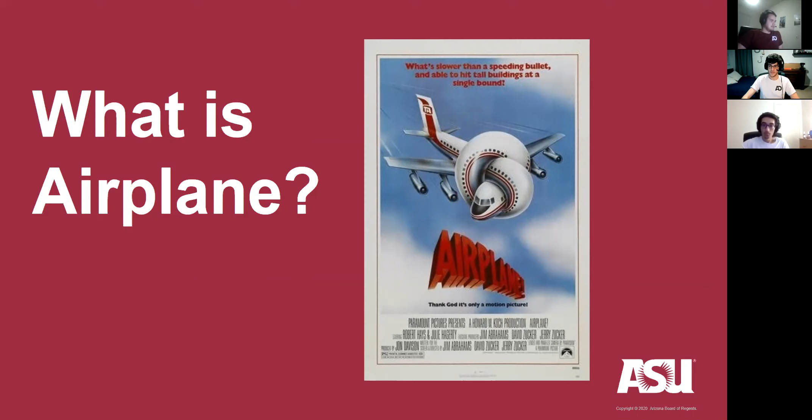Very essential, very prime. Next slide. So, as we all know, Airplane is a movie released in the 1980s involving the wacky antics of a former pilot trying to win back his girl. Great movie, by the way, recommend you all see it. Fantastic, a joke every 5 seconds. Good jokes too. Next slide.

So, the legal definition of an airplane, according to the FAA, the regulatory body that regulates aviation in the United States, at least. Sorry, I just had a message pop up. So, an airplane is an engine-driven, fixed-wing aircraft heavier than air that is supported in flight by the dynamic reaction of the air against its wings. Fairly simple definition. But if we go to the next slide,

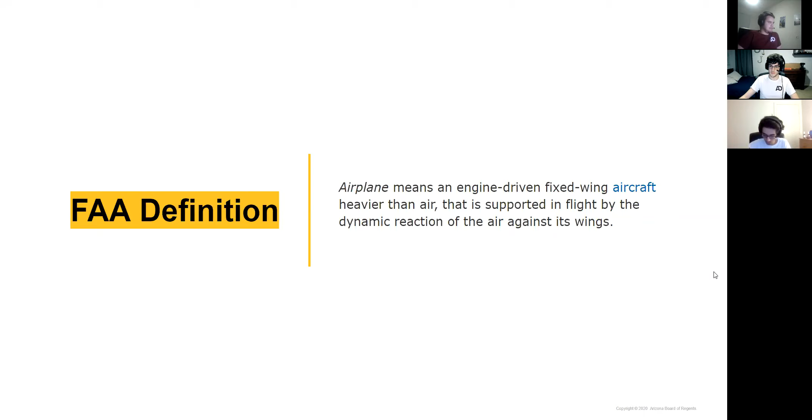I want you all to let me know which of these is in fact an airplane. We will not be advancing until I get some answers.

I really like the leftmost one. Yeah, the top left or the bottom left? The top left, but I don't know if that counts. Oh, it doesn't have wings. Does it have wings? It has short, stubby wings, but sadly I think it's more helicopter than airplane. I wish. Still badass, I wish though. Very badass. Any other guesses?

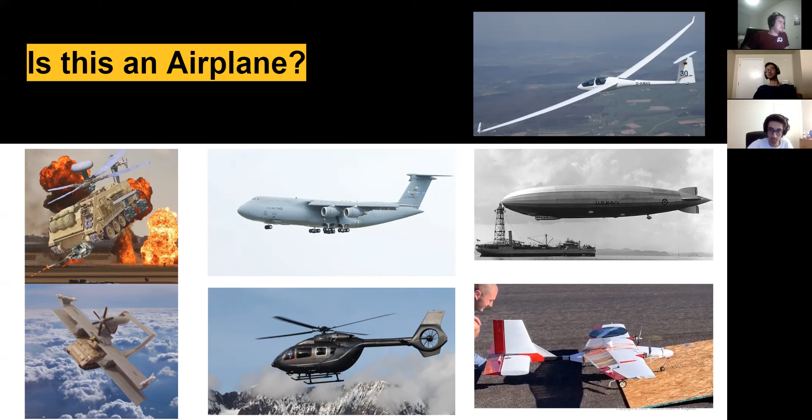What about that middle right? Does that look like an airplane to you? It's a nice blimp, or I forgot the other word for them. It's a dirigible. Yes, it does look like a bad idea. And will you reveal the answers please, my dear co-host?

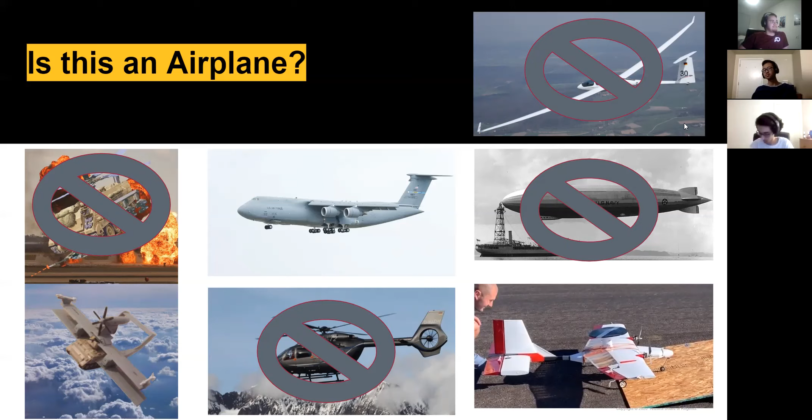Yep, all right, simple enough, all right. But let's get ready for the challenge round. Next slide. Which of these is an airplane in its current configuration?

Can you repeat the question? Which of these is an airplane in its current configuration, by the FAA definition? Let's start from the top left and go clockwise. Do you think that is an airplane? I think that's an airplane. Yes.

Okay, okay, how about the top middle? I am confused by the top middle. That's why it's the bonus round. I don't think it's an airplane. Don't think it's an airplane.

All right, what about the top right? Is that an airplane? I'm gonna go no. Those military ones, right? Yeah. Yeah, Osprey, is it called? Does it have wings? It is an Osprey. It goes like that, and then it turns into a plane.

Yeah, but in its current configuration, is that an airplane? Top right, no. No, nope, it's a helicopter. I like that, or a UAV, Osprey. Not UAV, it's a VTOL, I think it's called.

Yep, detail. All right, what about the bottom right? Is that an airplane? Is that also a vertical takeoff jet? No, can't is it? That is the same aircraft as the top right, but in a different configuration.

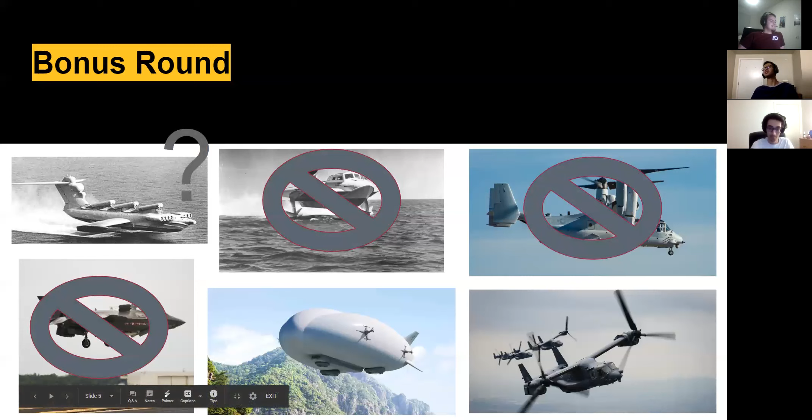F-35B Lightning II. Yeah, what's the middle bottom airplane? So yeah, that's a trick question for you.

Let's start with the top left. The FAA actually has no definition for what that is. It is technically a ground effect vehicle, also known as an Ekranoplan. For those who have taken more advanced aero classes, it uses the ground effect to create a cushion of air underneath the aircraft. But the FAA doesn't have an official ruling on what constitutes a ground effect vehicle and whether or not they are in fact aircraft. No one's really asked.

So if it's in the air at the time, isn't it an airplane if it's not touching the ground or water at all? Is it really flying, or is it just kind of a very low flying, limited altitude airplane?

But is a hovercraft an airplane then? It doesn't have wings. Right, yeah, that thing's got dynamic reaction against its wings. Well, the FAA doesn't know. Maybe give them a call. I think that was developed by the Soviet Union in the times of the Cold War.

So the top middle is a hydrofoil, which has wings. It has engines, and it uses the dynamic forces against its wings to rise off of the surface. But it is a watercraft and not an aircraft. That one also actually has wings providing lift to keep it up on top of the water, which is kind of neat.

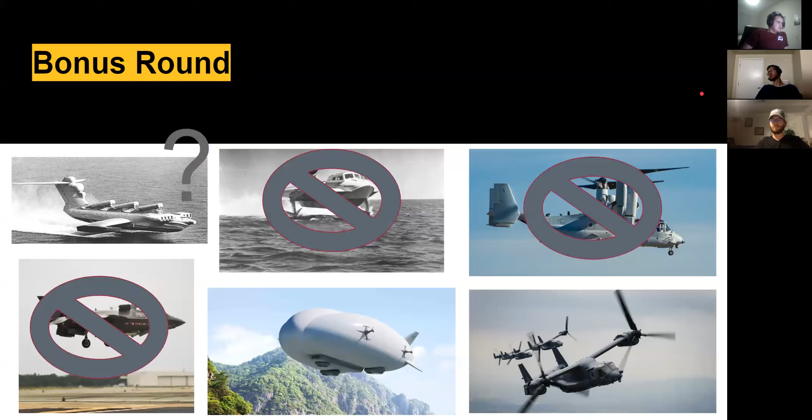And the bottom left is an airplane normally, but in this current configuration, it is hovering with the force of a lift fan and a jet turbine. So not an airplane in the current configuration. So yeah, it gets pretty complex.

Evan, you want to talk about this? Well, me, Evan, or yeah. Oh, all right, cool. I mean, you made these first few slides, so you will be covering it in the next few, but yeah.

Okay, cool. So now that I've got the floor, we're gonna talk about the actual forces on the aircraft. Since Daniel's been talking about how we're getting these aircraft off the ground with wings - the quote there is the dynamic reaction against the wings - we're gonna basically go into the 4 forces of flight, which are real simple here.

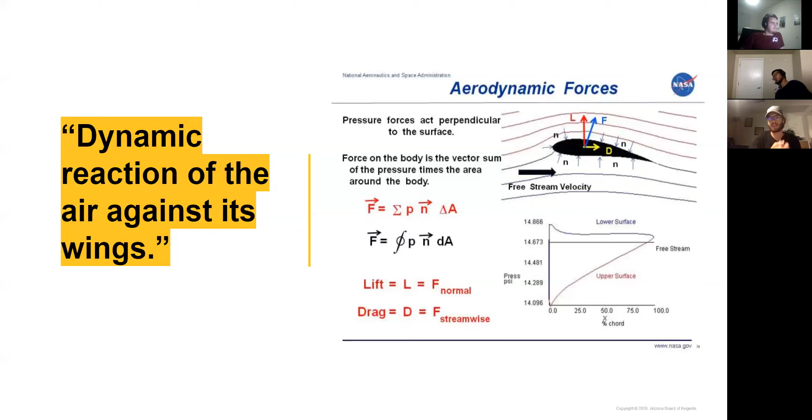If you go - I don't know what this slide is, it's kind of just an introduction to all the jargon you're going to get. But if you go to the next slide, these aircraft are not just magic. There's actual real science that goes into how these airplanes fly. Except for whoever drew this little design here.

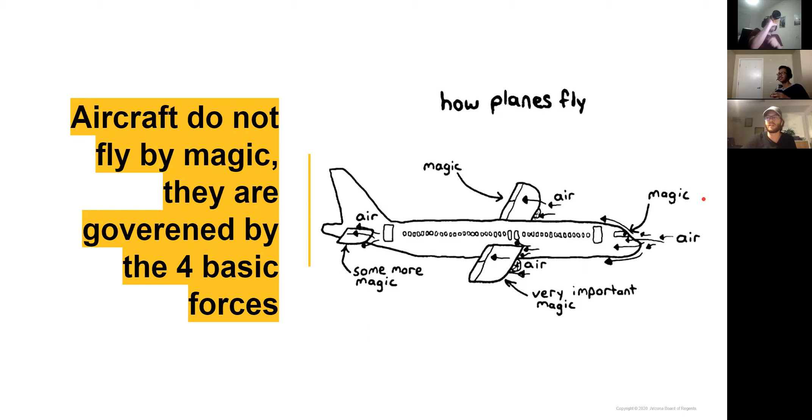So if you go to the next slide, you can see these are the true 4 forces of flight. Anyone who's ever tried to fly an aircraft or work for a company that flies aircrafts, the only thing that keeps you above is your dreams, and keeps you going is money. And if you don't know what the FAA is, you will learn very quickly that it is the Federal Aviation Administration, and they put all the rules just to bring you down.

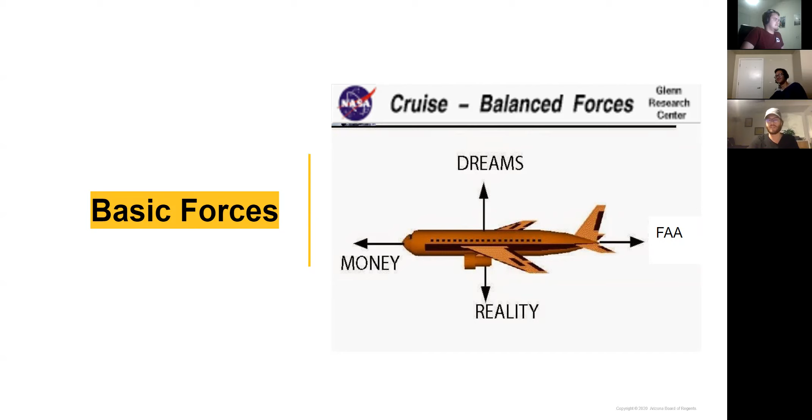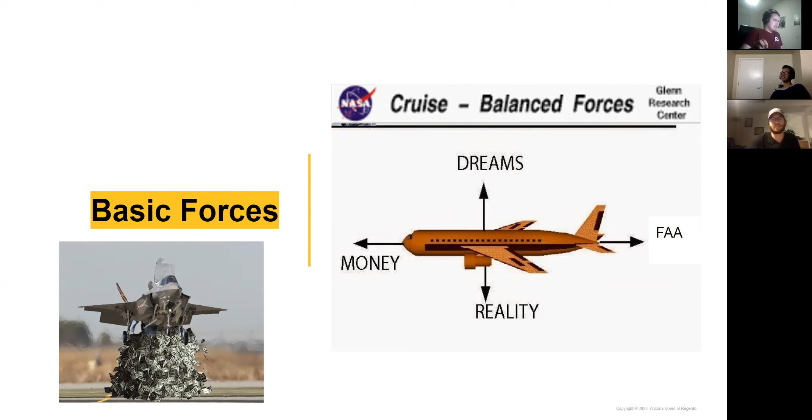So this is how an airplane flies. If you want to go on to the next one - sometimes actually, the forces are flipped, and money is actually providing the upwards force instead of dreams, and dreams is pushing you forward. So, all right, so here's the part that I was actually prepared to present, the actual aerodynamics design.

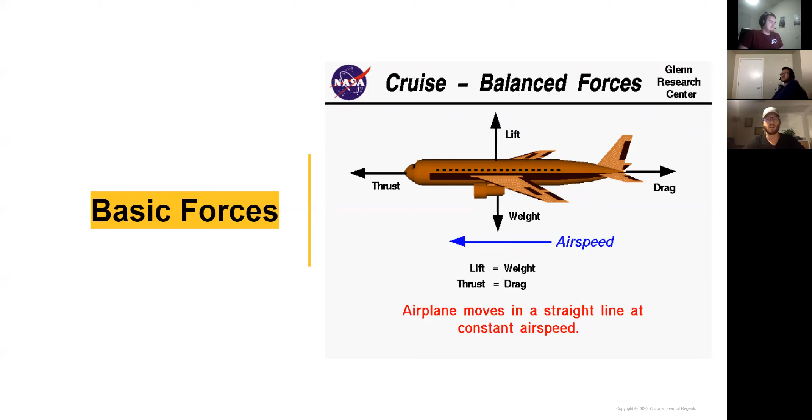First force that you see is lift. If you put an airfoil in free stream flow, the flow going around the airfoil actually creates pressures on both surfaces. The first equation we're ever going to give you is that force is pressure times an area. There's forces on both the top and the bottom of the wing, and if there's an uneven force, it pushes the wing in that direction. Lift is simply the vertical component of that force. So if that force is pushing you up into the sky, that is lift.

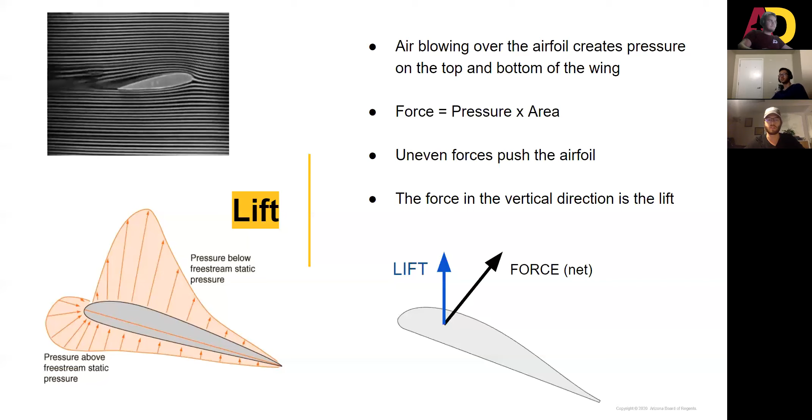It usually comes from your wings, but you can see different types of lifting surfaces. It's the idea of airfoils as well, to manage the flow over the wings. You can see in the top left, the wing is actually changing its angle, and it's changing the flow around the wing, which is changing the lift on the wing.

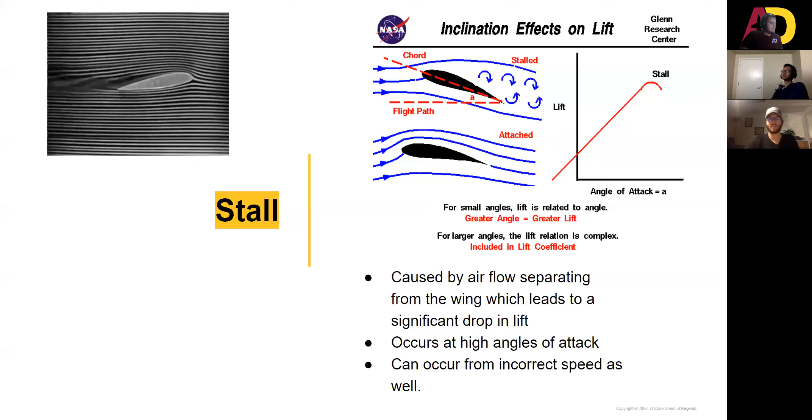The same force that's creating lift actually also creates drag. If that force is not going perfectly straight up, it's going in the wrong direction, and it's pulling your aircraft backwards. There are other things that contribute to drag, like skin friction drag, which is just the actual air pushing against the skin and pulling your airplane back. You can kind of feel it if you stick your arm out the car window, especially if you put your hand forward — there's a lot of force pulling you back. That's drag.

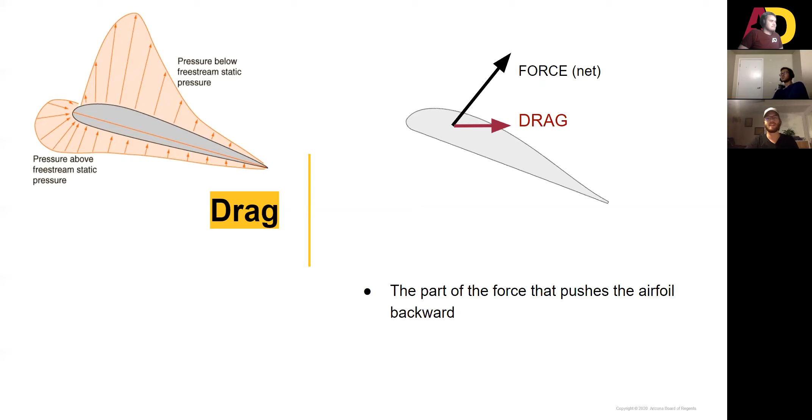Then thrust — now we're getting into a fun force. Thrust is used to oppose drag. It's where all your engines come in. If you can't overcome drag, you can't take the airplane off the ground. But if you keep going with thrust, you can overcome your drag. Then at cruising, you actually want your thrust to equal your drag, because those are forces — if you have equal forces, you can continue at the same velocity without accelerating.

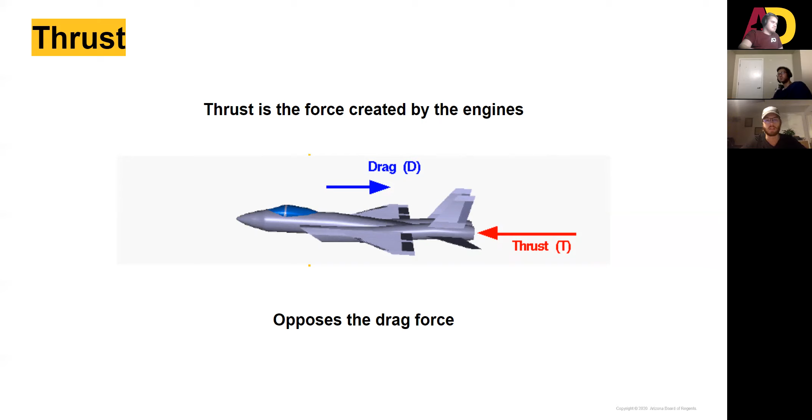Finally, the weight of the aircraft. It's real simple — you put the airplane on a scale, and that's how much it weighs. Sometimes you can fit an airplane on a scale, sometimes you can't. We can put ours on a scale sometimes, sometimes we need some help, sometimes we do modifications to our scale, and sometimes we have our mass properties lead do some fun stuff with our airplane. But it's really just weight as you think of it.

If you want to get technical, weight is still a force—it's still mass times the acceleration of gravity. And that's kind of one of the most important topics in aircraft design.

The heavier your aircraft is, the more lift you need to oppose that weight. But the more lift you have, the more drag you're going to get, because that force is going to be greater. To overcome that drag, you need more thrust, but to get that thrust you need bigger engines, which gives you more weight, and when you have more weight you need more lift. It just keeps going in circles until you find something that works. It's not a straightforward process of here's an airplane, make it fly.

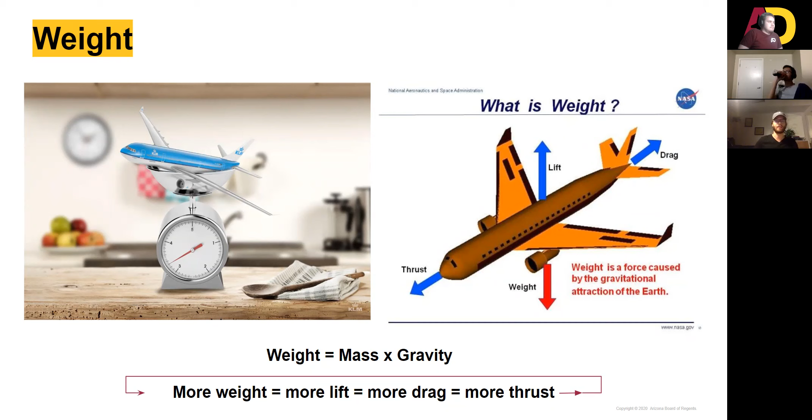That should be all I have on the 4 forces of flight, so whoever's next can take over airplane parts.

So, basic airplane parts. Here are some of the ones we use here in Air Devils. You're going to see this on every aircraft in the air—of course, you've got your canopic jars, the vestigial head, intakes, neck, and antenna. You'll see this on every aircraft in the sky, but now you know how to describe it. Especially the love handles, can't forget those.

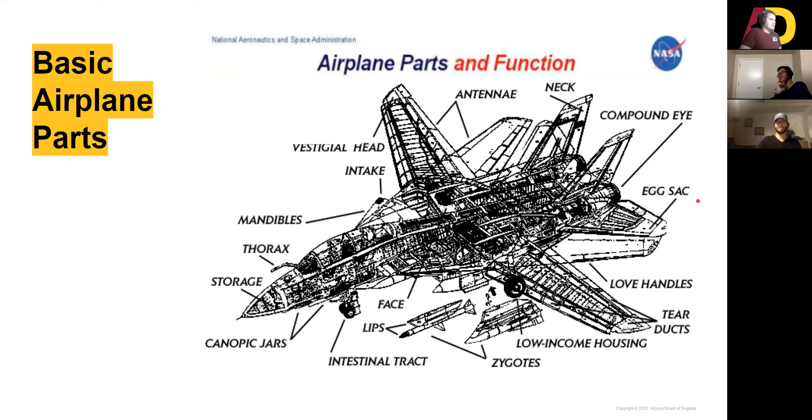Next slide, here are the actual airplane parts. There's a lot of them, and some have different names: horizontal stabilizer, vertical stabilizer, rudder, elevator, flaps, aileron, spoilers, slats, fuselage, cockpit, the engines, and one of the most important things on the aircraft, the wing. You need all of these pretty much to fly, though sometimes it'll be in a different configuration than what you see in the sky.

Below each of these different airplane parts is one of its basic functions. Sometimes you'll have aircraft that don't necessarily have a conventional horizontal stabilizer, vertical stabilizer, and rudder. Instead, they'll have just one giant wing, and those parts have to be built into that wing. But this is a basic configuration and the basic names and what they do. Really simple.

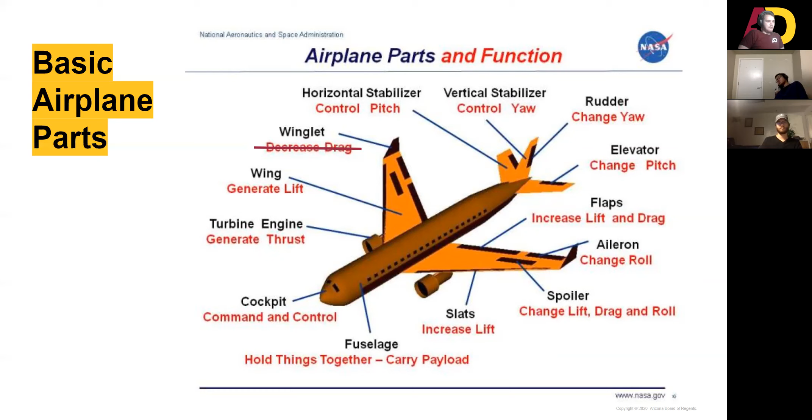We'll talk a lot about things to worry about when the aircraft is moving dynamically, so when it's not flying straight and level. As said on the previous slide, elevators, which are on the back of the aircraft, cause the aircraft to pitch up or pitch down, basically rotating around its lateral axis through the wings. It pitches.

The ailerons on the ends of the wings cause the aircraft to roll—if you're flying straight, this is roll. And finally, yaw, which is moving along the vertical axis, as the diagram pretty easily shows. So those are the basic movement terms we'll use, besides going forward and going backwards. Hopefully not going backwards.

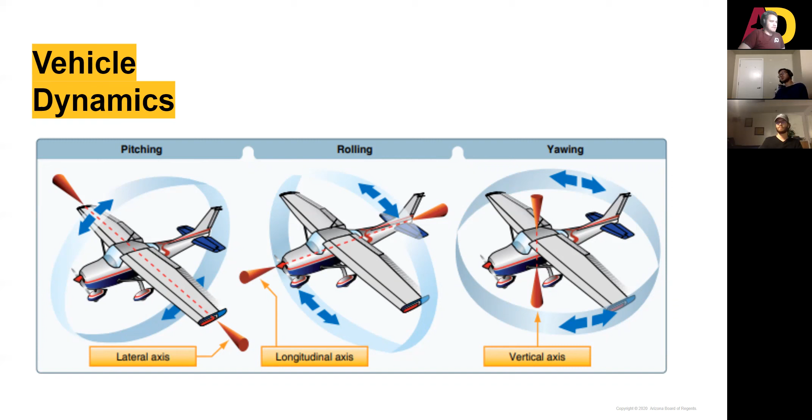Everyone has a different idea of what an airplane should look like. If you look at that comic, you'll see each different group has their own idea of what the ideal aircraft looks like. As someone who's been part of a production engineering group, that's definitely what the ideal airplane looks like to them—a block of wood nailed together. Definitely the ideal aircraft. But it's basically a series of design studies, compromises, and assumptions, propelled with enough force, and designed such that it requires minimal lifting gas and the occasional singularity to allow the numbers to line up, and for the platform to leave its earthly shackles. An airplane impresses on the world your mastery of the sky, showing those stupid birds who's boss. It's all about showing the birds up.

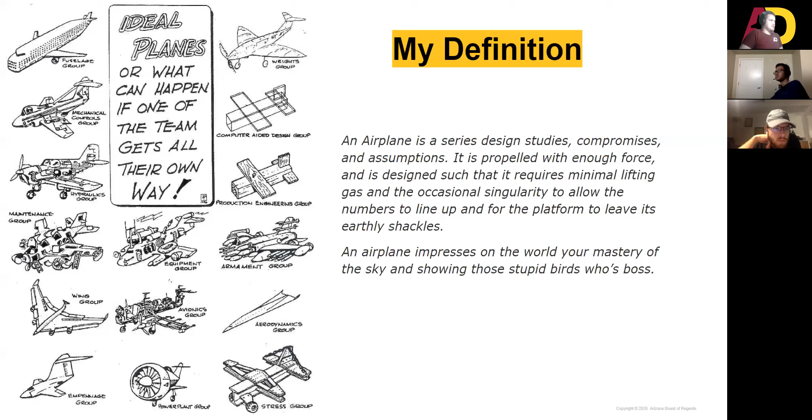Here's just an introduction to what we're dealing with. On the first day there was gravity, and the spirit of Newton said that formula, and matter became weighty, and so on and so forth. The devil created drag, of course, and there's a lot of different things to take into account. But he who controls the purse strings controls the policy, and then there was economic reality. Damn Keynes, Keynesian economics—you really screwed the pooch for us aircraft people. We have to take into account economic reality when designing things.

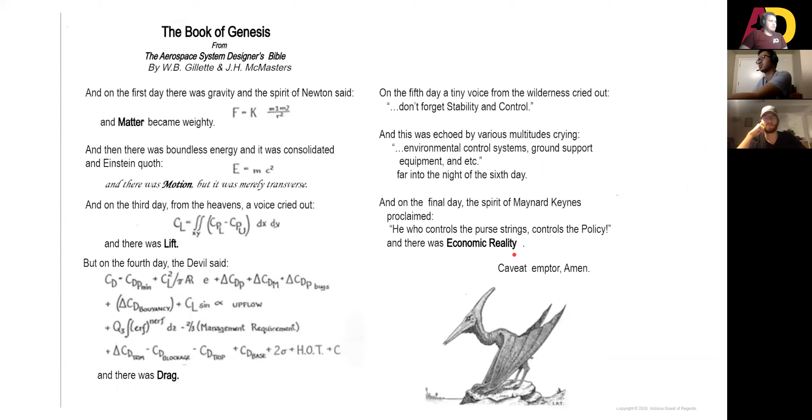So, of course, what you were all here for: terminology. What is an aircraft, or what are all the parts we're talking about when we say ESC or receiver and everything? Well, if you go to the next slide, someone will tell you.

Oh, is Atish not here? Evan, do you want to describe what some of these aircraft parts are? Oh yeah, I'm here. All right, let's look at this thing.

So a couple things about the LiPo, I guess. Well, we'll get into it more, right? So I don't really need to talk too much. Oh, hey, but just in time, Tish is here. Are we talking about everything or just a little bit right now? Just a little bit, like the ESC and receiver especially.

The LiPo, you can judge how much energy they have in watt hours, and there's some equations for that with the size of the cells and the voltage. They're categorized in cells. A 1-cell battery has one little LiPo pack, and a 3-cell would have 3 connected in series, so the voltage goes up. Each cell is like 4.2 volts fully charged, so when we use a 6-cell battery, we're at 25 volts. So we get up there in power.

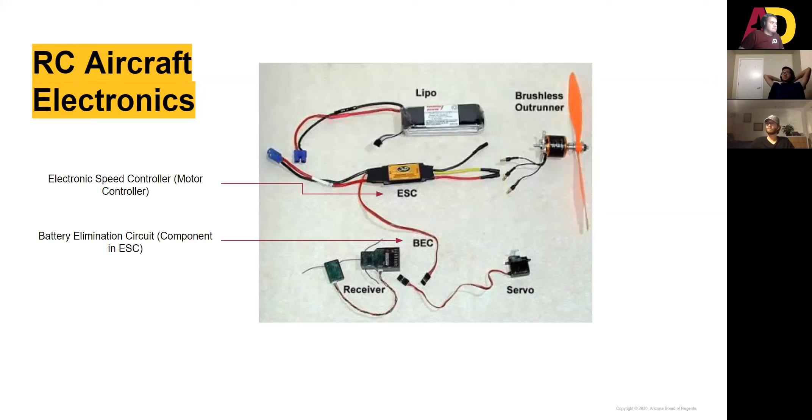The brushless motors: you have the 3 wires, and there's magnets on the inner part. The whole outside of the motor spins with the shaft, and the only thing that stays put is the very back part, which connects to your motor mount. Then there's the inner part, called the stator, and that's where all the electricity flows. There's windings in the motor that go in a certain pattern to pull the magnets, which are on the inside of the outer portion, called the motor bell.

So the inside of the motor bell has little magnets, and you send current through the stator in the correct way with the 3 wires, and it will pull the motor in a circle. That's how you get the spinning torque.

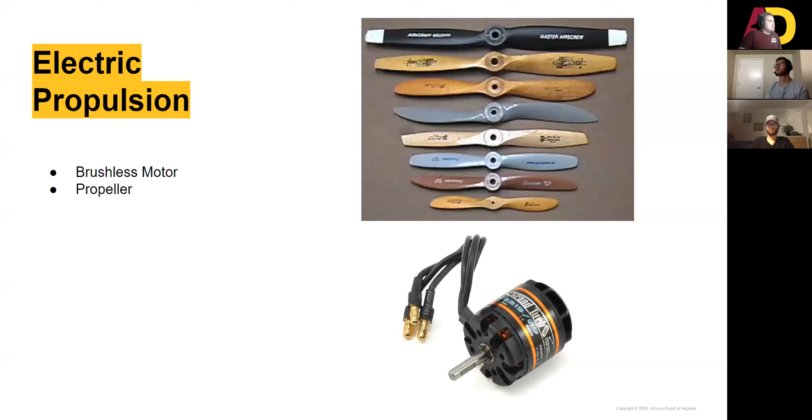That's about it there. Can you exit out of the slide real quick, Jack, and go back in? Oh, there's a new one. Yeah, so that new one is called an EDF, an electric ducted fan.

It's pretty much just a little jet engine. It's a ducted fan, so the outside makes the propeller more efficient because it stops the tip vortices, right? Yep, yeah, that's another thing they get into.

In short, those are made for really fast and high power applications, but they don't really give you a lot of low end thrust, which is what we usually need in the club. They're really cool and have their specific design applications, but you probably won't see much of what we're doing use them.

I wonder if, since we don't have a takeoff requirement or a 100-foot takeoff requirement this year, we could probably get away with the EDFs. It would be fun, it would definitely be sick. Yeah, something to think about. They suck up crazy amounts of power, very true, but they're cool.

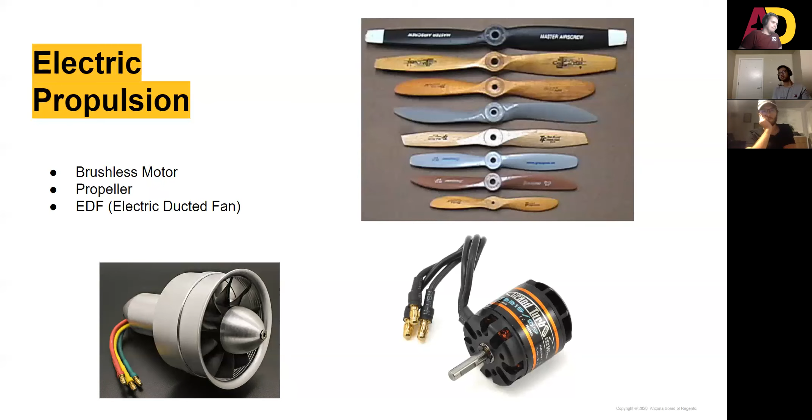All right, next slide. Now it's my turn. I'm going to talk a little about structures, both like how we're currently building our RC planes, and a little bit about how commercial airplanes are built.

We also do quite a bit of testing for our structures, but not always. We now have a MATLAB code that allows us to develop optimal... oh, we'll get to it.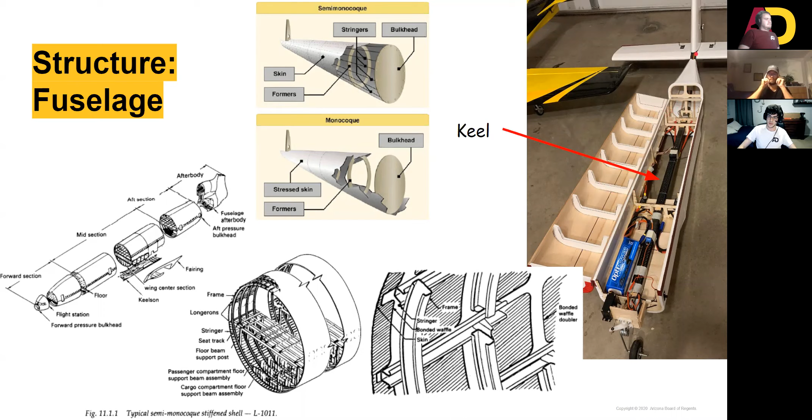And those are drilled directly into the keel and glued. It's quite sturdy, and you can see here there's no holes for wires. That was a mistake that was a pain to correct.

And this is the vertical tail, and this is its rudder. And so you can kind of see how this would attach there. And then this whole vertical tail goes on the box along with the horizontal tail. And so that's pretty much our carbon fiber keel right here segment. You can't see, but they do a similar thing.

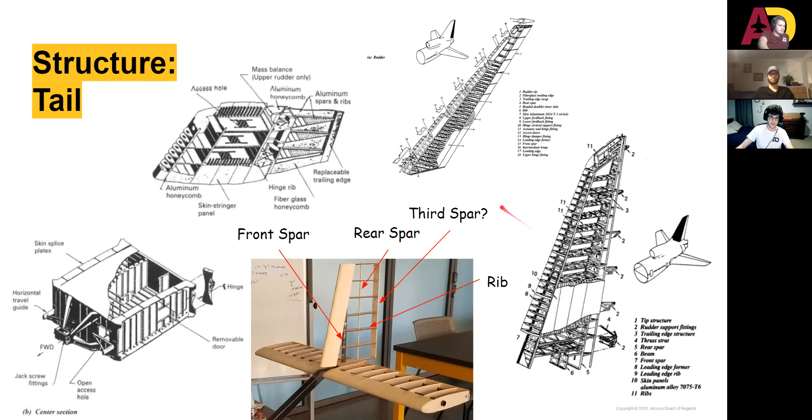And the most entertaining part about our aircraft is the landing gear. It's just a piece of carbon fiber. So, they're the same thing.

T is actually releasing a book pretty soon on landing and takeoff performance. And just the other day, I was walking with him, and he told me about how the aircraft is completely sized just on the landing gear. So he knows quite a bit, or is quite fond of landing gear. So if you want to know more, you can talk to him.

One quick thing on positioning, I noticed this actually came up, is that whatever the highest angle of attack you're planning on taking off, you're going to want to place your landing gear accordingly, or change your rear of your aircraft so you don't tail strike.

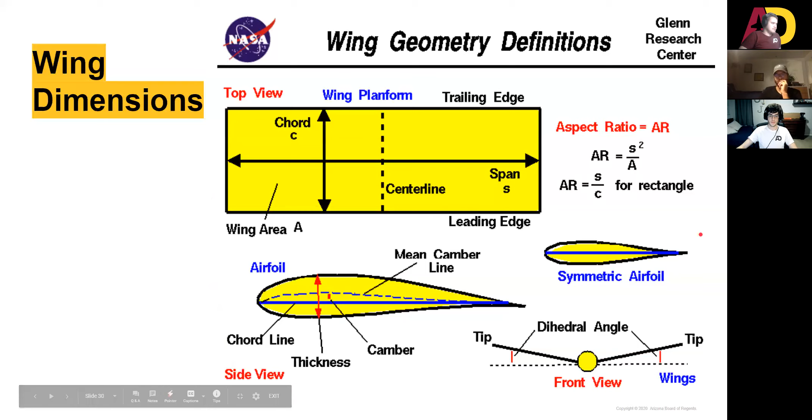A whole bunch of shapes. We mostly use a simple rectangular wing with maybe a slight taper to it, because we're not bound by compressible flow, so there's no real reason to have sweep on our wings unless we want to move our structure away from our center of gravity, but we don't really have those issues.

If you go to the next slide, a bunch of other things we like to talk about is what is the planform of the wing and where the wing is located on the body. As you can see, there's a whole bunch of different options.

Dihedral is when you have the wings usually at the bottom of the aircraft, but then have the wings angled up, and it basically lowers or raises your center of pressure for stability reasons, because an airplane is a dynamic object. But again, it's a little advanced. There's anhedral, all sorts of different stuff.

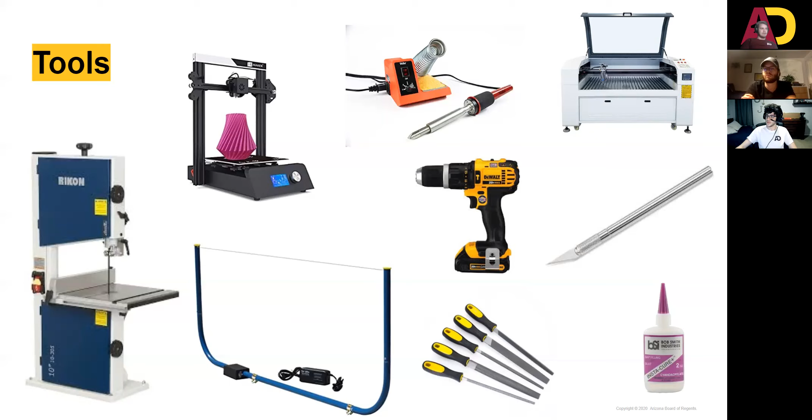We don't usually use foam on our competition planes because, believe it or not, for how light foam seems, a balsa wing is even lighter. If you go back a few slides, that balsa wing is really light for all the weight it can carry.

So balsa wood, while it might seem archaic to build an aircraft out of, and is in fact highly discouraged by the FAA to use any sort of wood, it works perfectly for what we need it to do, and it's very easy to work with compared to metal or composites, or more advanced composites.

Where is Nick now? Nick is going to grad school at Georgia Tech, getting his master's. Is he going to go into DBF for Georgia? We better hope not — that'd actually be kind of cool to see him at competition. Yeah, that would be sweet. We'll see.

Does anyone have any questions about anything RC related or aircraft related? We've used up our time fairly efficiently here.

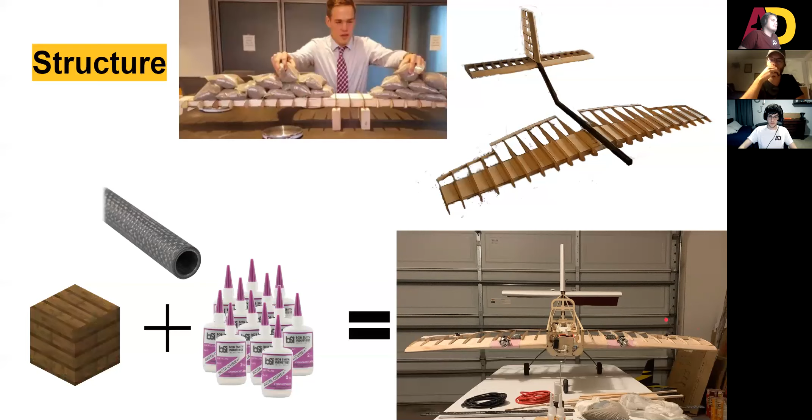Could you go back to the wings slide? Not this one, the other one, the one with the anhedral and dihedral wings. Okay, yes, that one. So I wanted to know what exactly does a gull wing and inverted gull wing design do to an airplane, and what are the lift distributions like on there?

Basically, the lift distributions on those will be pretty much exactly the same as if it was a straight horizontal wing. So why do they have inverted gull wing and gull wing, dihedral, and anhedral designs?

It really depends on what purpose the aircraft is for. I don't think I've seen a gull wing plane before, so I was able to understand dihedral and anhedral, but gull and inverted gull wing are kind of weird to me — I don't get why. Daniel, do you know of a gull wing plane?

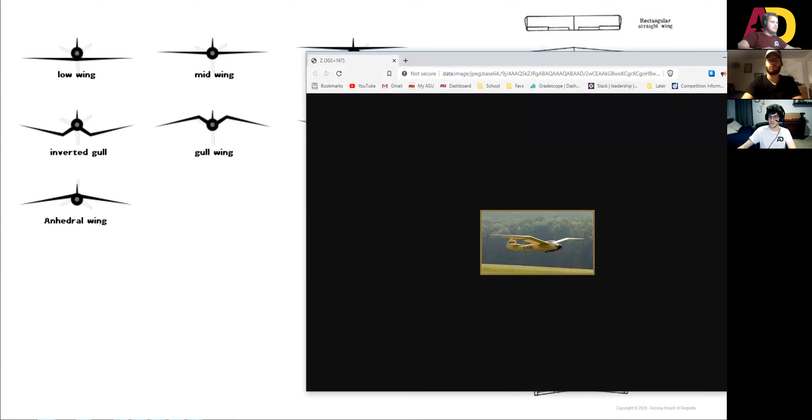Oh, there you go, there were several. Look at that, so that's a gull wing. It doesn't really have anhedral on the outer portion, so it's kind of still a gull wing though. Can you pull up an F4U Corsair, like a Corsair head on? We need to find a picture with the landing gear down too, that's more specifically what we're going for. Here, okay, that's fairly good.

As I mentioned earlier, aircraft are a series of design studies and compromises. So on this specific aircraft, it has an inverted gull wing for two reasons. One, there was a NACA report showing that a mid-wing was the most efficient configuration, producing the least drag compared to a low or high wing. So they wanted a mid-wing, but doing so with the landing gear on the wings would have meant extra long landing gear, which would have had to be extremely heavy to fit the giant propeller on the front.

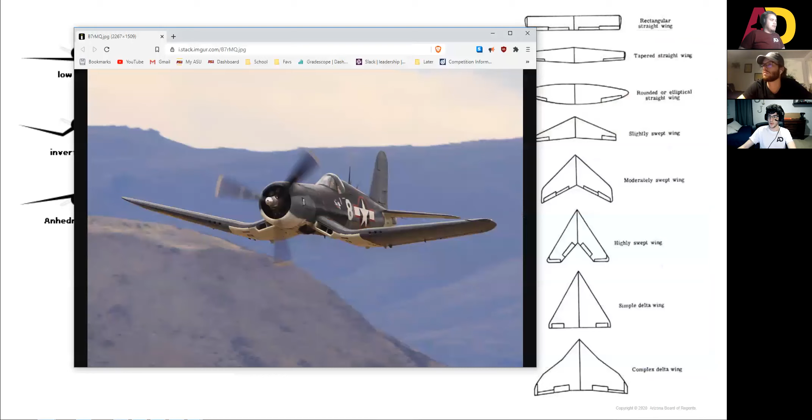So the gull wing allows a good compromise, letting the landing gear be short while also allowing the propeller, which is huge — I think about 13 or 14 feet in diameter — to be larger than it otherwise would be, since otherwise it would start striking the ground. You don't want that on a plane. Absolutely massive, one of my favorite planes.

And the other thing that a gull wing allows you to do is, if you close out those two or minimize them, it allows you to do some sort of dihedral as well.

And the reason you want dihedral and anhedral is that it changes where your center of pressure is, which is basically, if you were to average out all of the lift generated by the wing, where would that be? It changes its vertical position relative to the center of gravity, which influences the stability characteristics of the aircraft.

Having an anhedral wing allows you to have your center of pressure closer to the center of gravity, which gives you a higher roll rate, which is important depending on what you want to do.

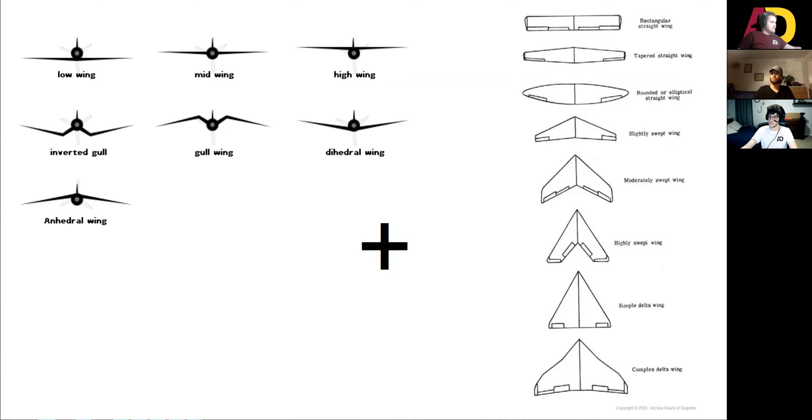Yeah, and this is for the wing design—this is the tapered one, and this is a regular one, the plan form of the wing. Whereas the other slide is more the other characteristics of the wing. Makes sense—this is its plan form, and the other slide is the configuration.

But yeah, like I said, you can't always design a plane to have the perfect drag characteristics, the perfect coefficient, because sometimes, sadly, other things get in the way, like being able to take off and land.

Another cool thing about the Corsair is that you can use its landing gear up to like 400 miles an hour or so. You can have them out because they're built so strongly to land on carriers that you can use them as air brakes to increase the drag the aircraft has. On a normal aircraft, you do not want your landing gear out past maybe 150-200 miles an hour because they can actually rip off.

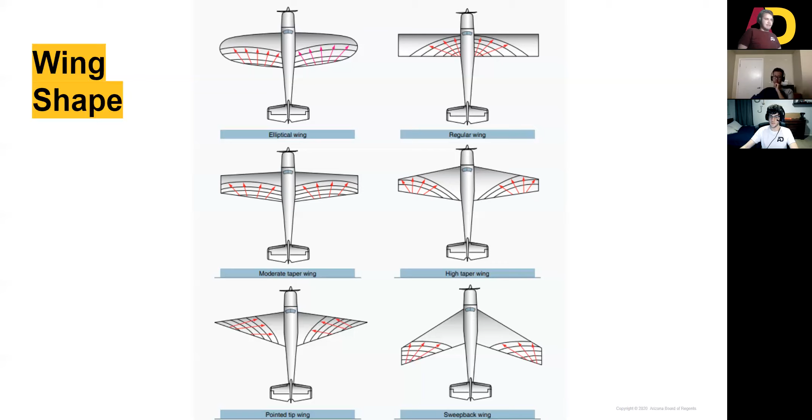I guess that's something else we can talk about—none of the aircraft we build have folding landing gear. True, that'd be cool, dude. I'm not sure there are any pictures of it, but yeah, all of our landing gear is fixed.

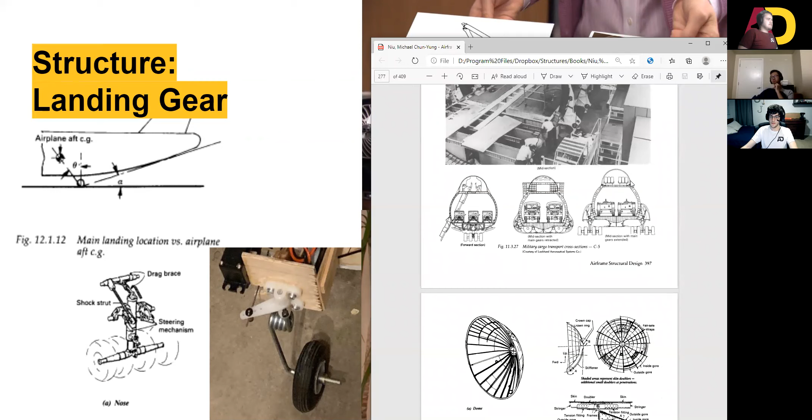That's mostly because there are significant drag reductions with having landing gear that folds back into the aircraft. However, at the scale we have, the drag is relative to surface area, and those large landing gear on a regular aircraft are much larger relative to their surface area than the landing gear on ours—different factors scale differently.

So on a small aircraft like ours that isn't going very fast, the landing gear produce less drag than what would be required to make them folding and retract back into the aircraft, because that folding mechanism adds weight, which means we need more lift, which means we need more drag—that continual and perpetual and devilish loop of more weight to more drag to more lift.

And the other thing for the scale we're doing, the small 5-foot wingspan planes or so, just building it is really hard enough.

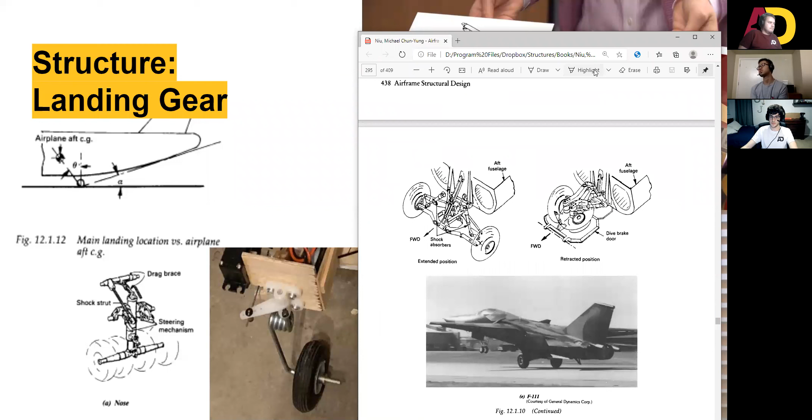So going with the simplest structure and just getting it done is really the main priority. It would be really cool to incorporate folding landing gear, but then you gotta find out how to attach that to the torque box and make sure the mounts are good. Then you gotta actually pick out the landing gear you want and make sure it can take the loads you need.

Especially with model planes compared to full-size planes, you could have a really unpredictable landing. For a model plane, taking a pretty big hit isn't out of the ordinary compared to a full-size plane. So scale-wise, you need to be a lot stronger than a full-size counterpart. You don't have someone in the cockpit who's able to feel how the aircraft is responding to the air around it, like if it's experiencing stall.

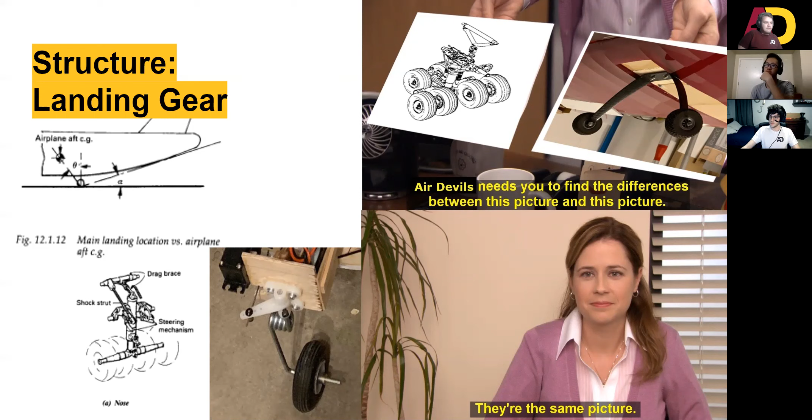You can kind of see it, but if you're in the aircraft, you can actually feel when it starts to stall. So a landing tends to be a lot harder at our scale. When we go on actual flight days, you see high angle of attack and other issues, like when the plane is coming right at you while flying, it's really hard to tell how fast you're going compared to flying it away from yourself. That's when you can get into issues. But that compared to actually being inside the plane is a whole different story.

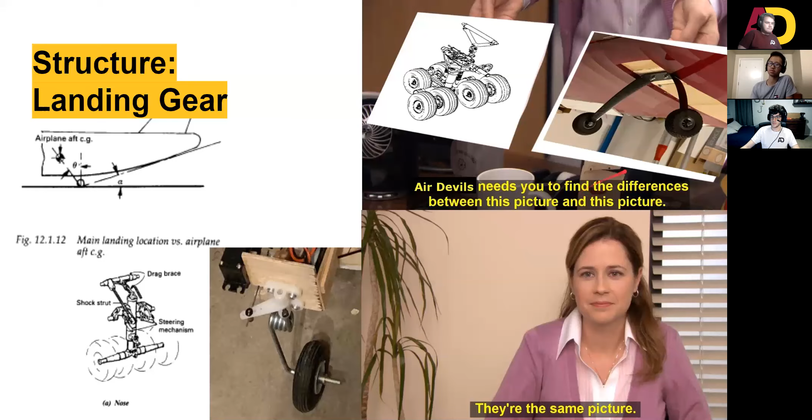Did you have a slide for the remote that we had? Oh no, I don't think we do. Oh, okay.

What's it called? You should pull up a picture. It's a Spektrum transmitter, really any one will do. I think it's a DX8, or DX9, I don't know. I think DX8. The one we have now is a Taranis QX7, but do we have any DX6? Yeah, that works, we have one of those. So that's the transmitter radio.

So you have the two sticks, and those move up, down, left, right. On the left stick, there are different modes, but for how we fly, forward and back is your throttle, and left and right is your yaw with the rudder. On the right stick, left to right is your roll with the ailerons, and up and down is your elevator pitch. The switches just control auxiliary channels. So for an RC plane, you really have four main channels: throttle, pitch, yaw, and roll. That's it, plus whatever else you need to do.

Like previous years, we had bomb drops and banner dropping, and that's what all the extra switches are for. The bottom portion has a little screen where you do all the radio controls, so it's basically a little computer. You could modify how things move and interact, and assign channels to switches. They can get really complicated, but like everything else, you specialize into it and it becomes its own little thing. We'll be doing that this year for sure, because we gotta figure out how to turn our sensor on and off and roll it up and down.

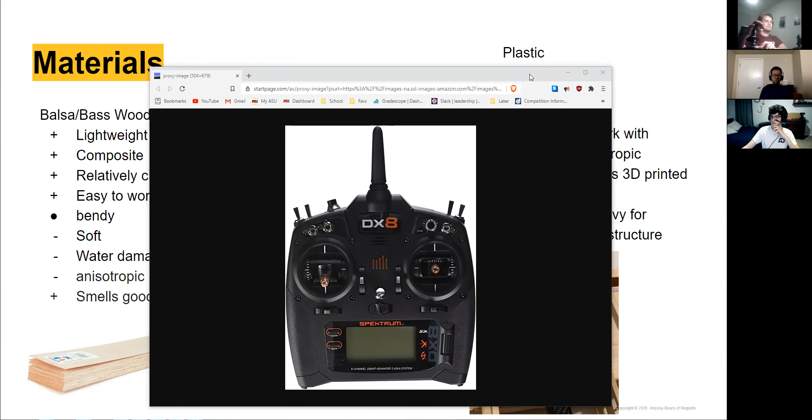So we can have a second transmitter, that might help too. Just to give a demonstration, I have this flight stick sitting below my desk. You pull back on the stick to pitch up, push forward to go down. You can rotate this, but I don't think you can rotate the sticks on our transmitter. No, there was a UAV drone quadcopter I was flying where you could actually rotate the sticks to yaw it, and it was really cool. Yeah, on this one there are little switches to do yaw.

Oh, okay, you just have that at your desk, Daniel? It's for flight sims, but yeah. Oh, okay, that's good. Which class? It's not for a class, it's just for fun. I wish it was for a class. Yeah, I don't think we have any classes, sadly, that do that.

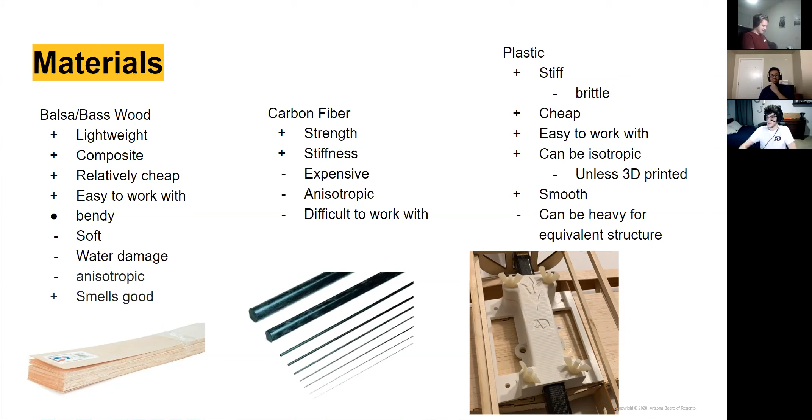Yeah, maybe in the private pilot program, or commercial flight, I think, but probably not really. It's all in a classroom, not actually doing it hands-on, which is kind of sad. It'd be cool to have home training like that, though. Maybe in the online college they'll have some virtual flight sims. Yeah, my roommate's in the professional flight program.